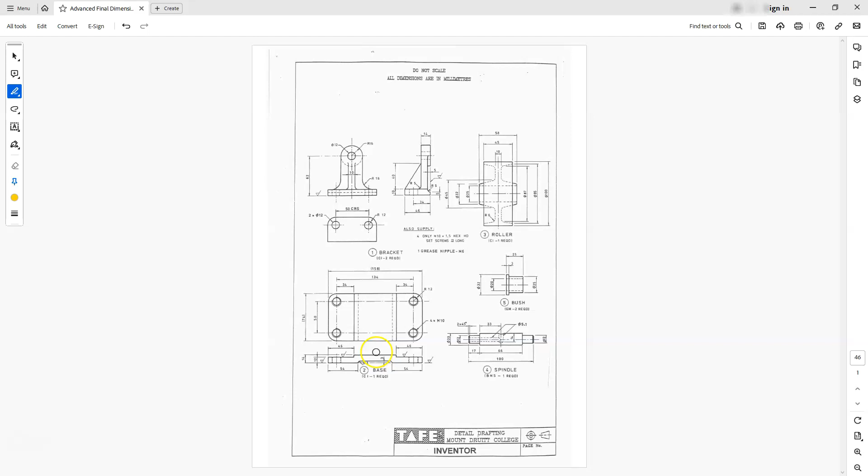Alright, so in this video we're going to be looking at the base. Once again, make sure that we're going to set up Inventor to do it in millimeters. And let's go ahead and get started on it.

Okay, so whether your screen looks exactly like mine or not, or you may have some other stuff going on here, the simplest thing I'm going to do is go ahead and click on the new icon here. So click on the actual piece of paper, and mine should jump automatically to the metric one because that's the one that we used last.

So remember that if yours is looking like the English US, you just hit the drop down and then click on metric, and then here are your options. So I'll choose the standard millimeter and then hit create.

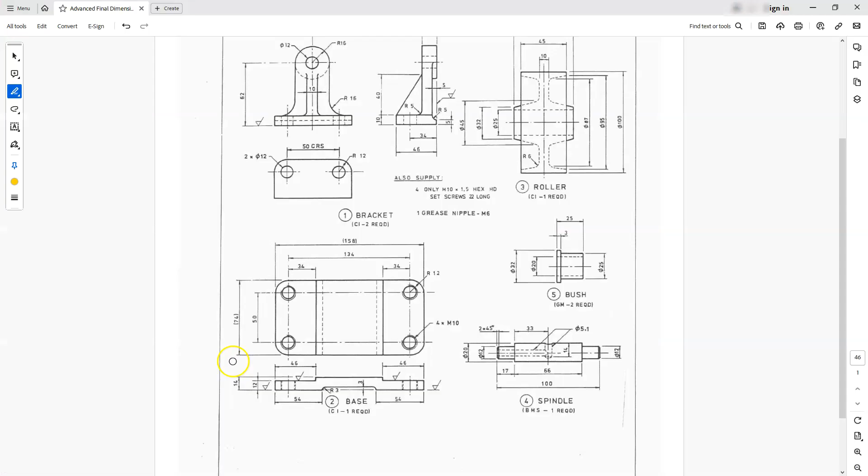Alright, so looking at this, I always try to visualize and see which would be the quickest way possible. And you can see that if I go ahead and create this shape here along the bottom and extrude it, most of the work will be done for me. So the only things I'll have left to do, you can see I'll have holes and fillets to do. But from that point, I think I'll be done. So I'm just going to create this bottom shape that looks like this.

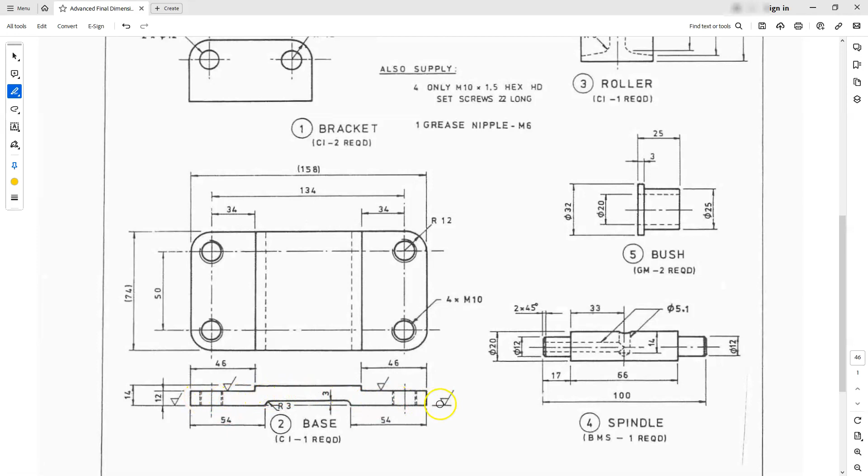Okay, so remember that you can hit the S button on your keyboard or select this icon. And then I have to tell it where I want to start this at. So I'm just going to start it again on the XY plane. And what I like to do is just kind of freehand and draw that shape a little bit. So I'm going to go starting from here.

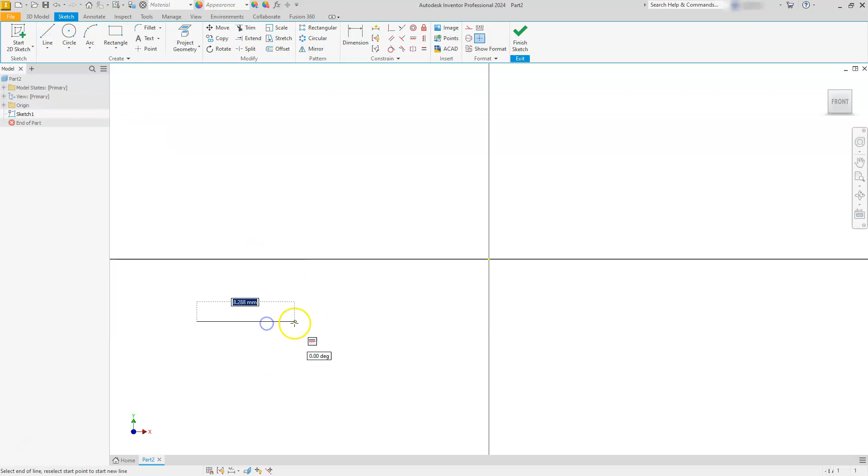I'll click here. And I can already type in a certain number since I know that that first length going this way is 54. I can go ahead and take care of that dimension here. And that's going to actually save me some work. And we can continue to do this around here if you like. So I can go up this direction, 3. Make sure that you're getting those little icons to appear.

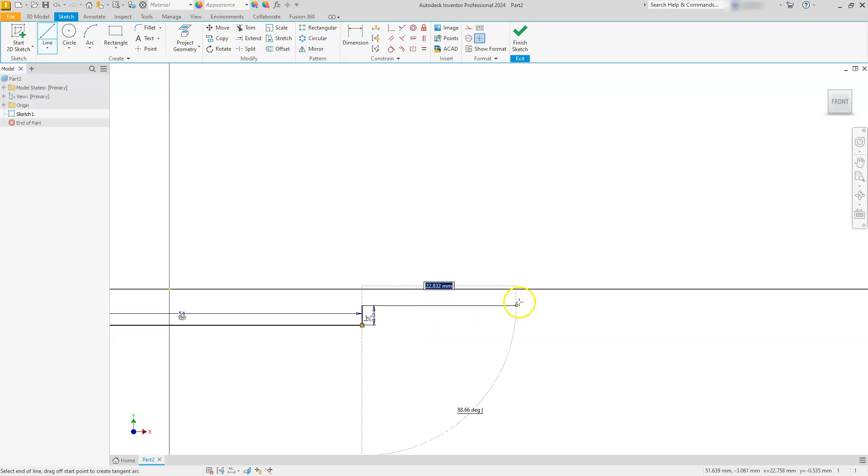I don't quite know how far this is, so I'm just going to click at a certain distance, come down, and now I'll get the tracking off of that point, and in this case, that's what we want. Do a left click, go this direction, 54 again. I'll zoom out a little bit, and I'm just going to go upward. And then I do have the height of this, and it's sitting at 12. And all of these numbers I will show you on the PDF. So I'll go 12 this way.

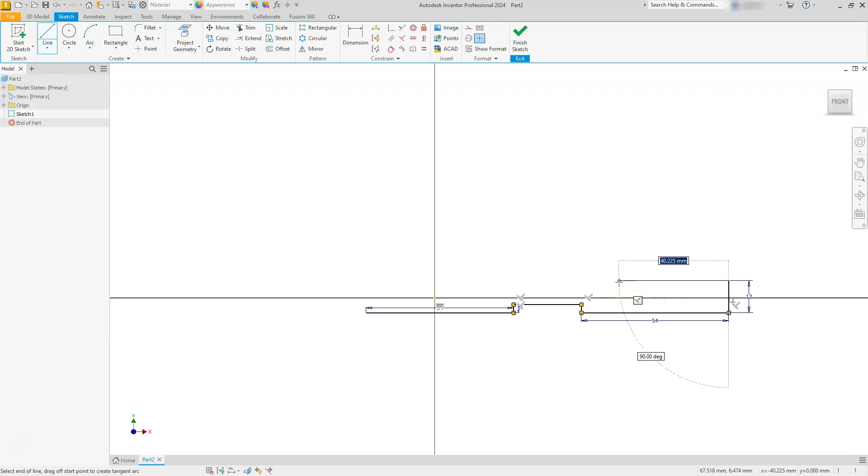This is at 46. Go up a number, doesn't matter. I'll go this direction, and I'm just going to kind of freehand the rest of this in. Try not to lock in on any of these other points here at the bottom. So I'll just come here, go down to where it meets here, come over to here, and then close it at this endpoint.

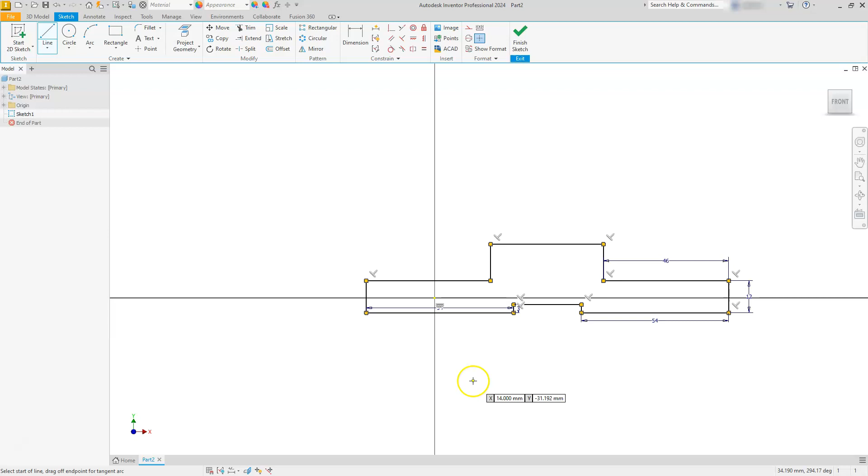Alright, so the reason I didn't put the other dimensions in is because I don't know the distance of this yet, so I'm just going to let Inventor solve that for me. Alright, so the next thing I'm going to do is go ahead and put the overall dimension on here, so I'll select this line, and then this line, come up, click, and that number is going to be 158.

So a lot of those numbers that you saw me create were both of the 54s. I created the 46. I also created the 3 here. And then I did a 12 on one side. Oh, I also did the 158 as well. Alright. So the next thing you're going to see me do is go ahead and lock in this number here.

And if I do that correctly, it should lock in these two numbers. Alright. So I have to put in one more 46, and then I can choose whether to put the fillet on this view or on the one that extrudes through. My advice to you is that most of the fillets I try to keep in one command, so therefore I will omit putting the fillet on my sketch.

And I'm doing that here in Inventor. If you want to see me do this one in AutoCAD, I will link that card up here next as well, so you can see there's kind of a difference. In AutoCAD, I will put all of these in, just to be on the safe side.

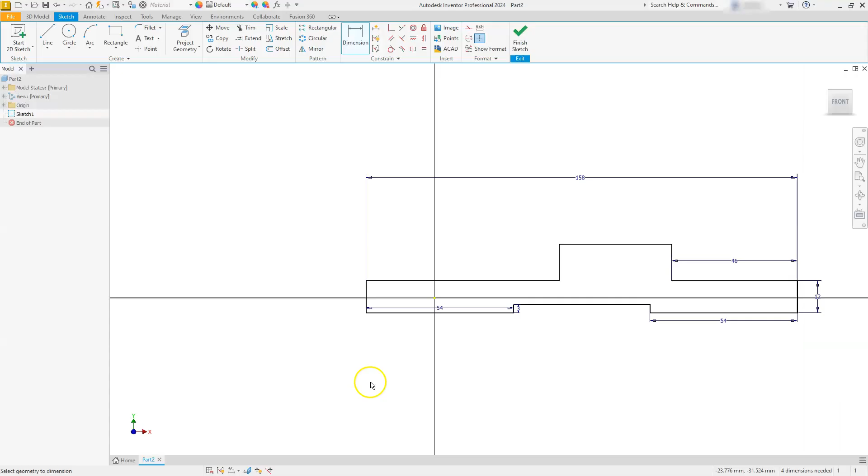Alright, so looking back at this, I'll go ahead and put my dimension of 46. Now there's another option here. If I don't want to actually physically put this dimension here, and I know it's going to be exactly the same as this, and keep in mind that I'll only do this if I know that something is going to exactly and always be the exact same thing, and in this case, yeah, we're not going to edit this.

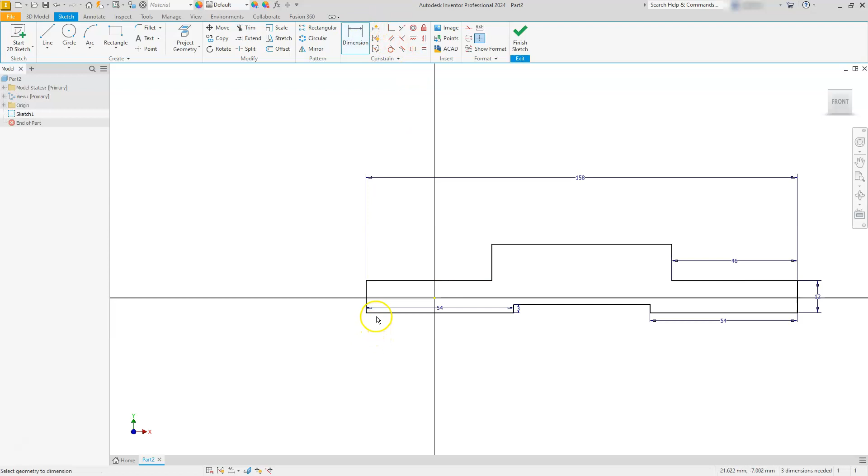I can use the equal constraint, which is here, and then I can just select this line and this line. So that's going to go ahead and create that at that 46 for me without physically putting a dimension there. Then I'll go back to the dimension. I'll go from here to there, and then I'll go ahead and place that at 14. And now we're at that point to where I need 2 dimensions, right?

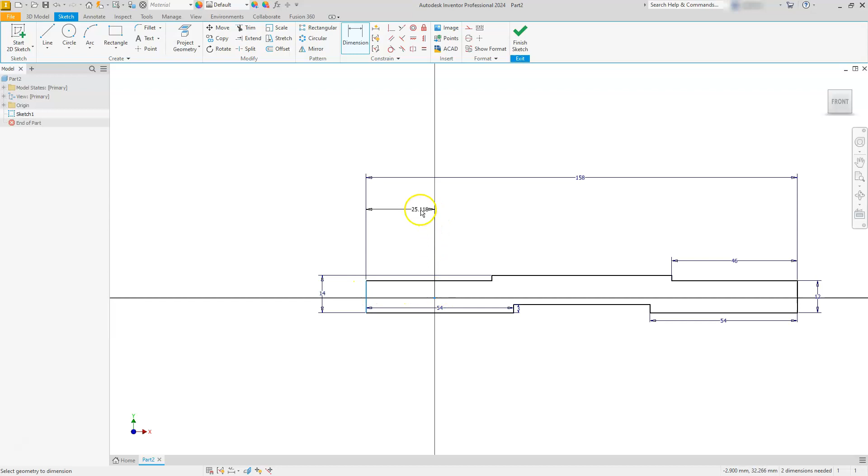One thing I like to do is always center my part on this dot. So I'm going to go to dimension, select my dimension, then select the yellow dot. So I selected that line, and then that yellow dot or the center point, click here, and then I'm going to type in a number. In this case, I want it to change as a function, so every time the length of this thing changes, I want it to always be in the center.

So while this is highlighted blue, I'm going to select my 158 dimension and divide it by 2. And you're going to see that your whole entire part moves over. I can do the exact same thing. So if I want to center this thing, the overall shape on this dot, I can select the dimension from this bottom line to the yellow dot. I'm going to drag to the left, and then I'm going to left click. So once I left click and place my dimension, I'll select the 14, and then I'll divide it by 2.

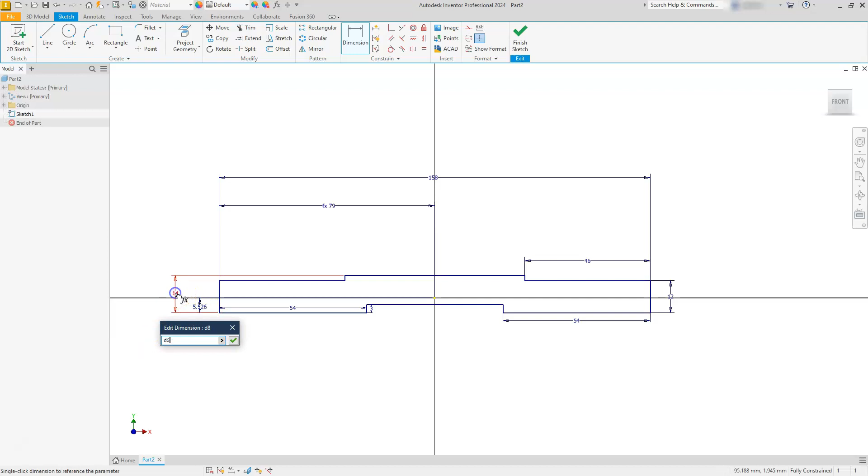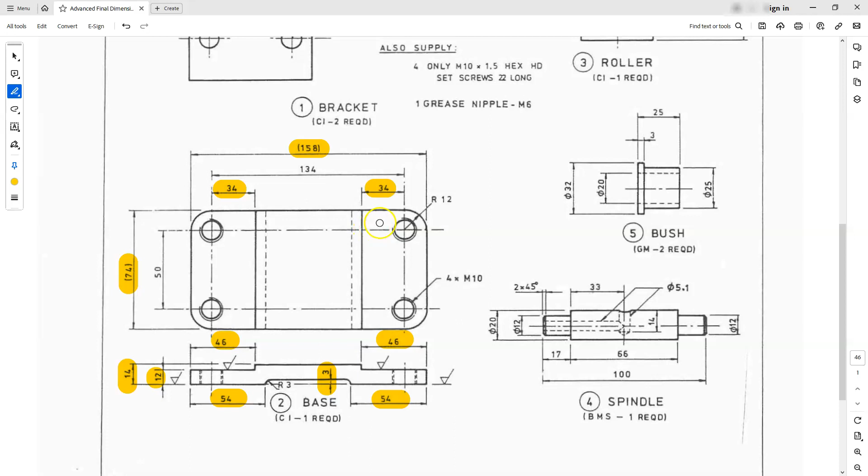You've seen on the other video when I created the bracket for this, that this 34 I actually didn't use. Really, it's because if you do the math on that, you will see that the center of your circle is always at 30, or at 34 from this one, just based off of the arc. So if you want to do the simple math of that, you can.

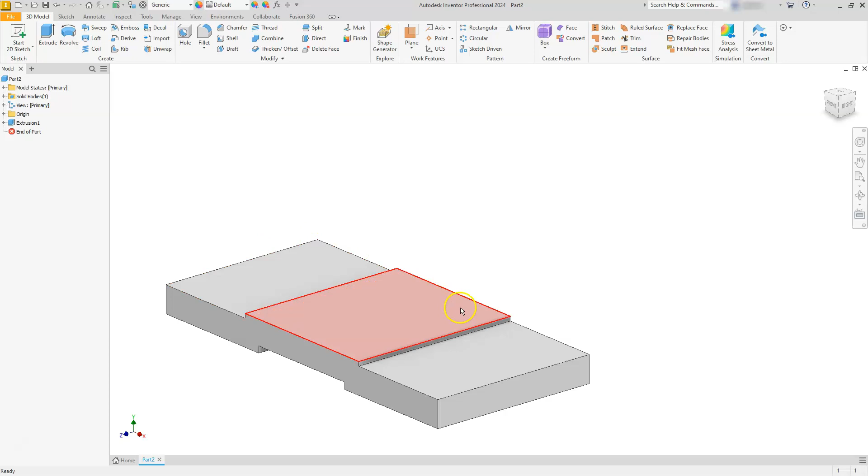Alright, so that length that I need here is going to be 74. I do tend to keep everything symmetric, and that way I can keep all of my planes in one location. Go ahead and hit OK. Next, I'll go ahead and take care of all of my fillets. So remember that we have a fillet going here and all around these corners at a radius of 12. And we also have underneath here, we have 2 fillets that are sitting at 3. So let's go to Fillet.

I'm going to start off with my big ones first. I'm going to tell it 12, then I'm going to select these corners. Just going to spin it around to the other side here.

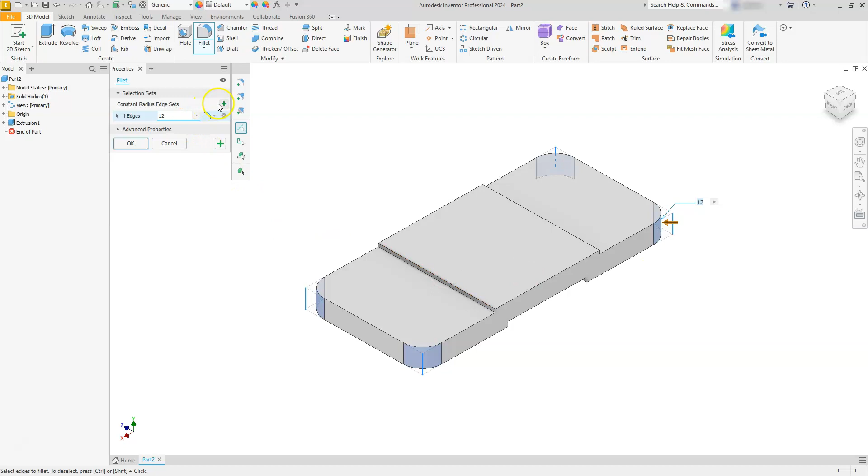Next, I'm going to put in my 3 ones. So I'm going to hit the plus sign that is located here. I'm going to change that number to 3. Then I need to look underneath here, so I'm going to select this bottom cube here. You're going to see it rotate up.

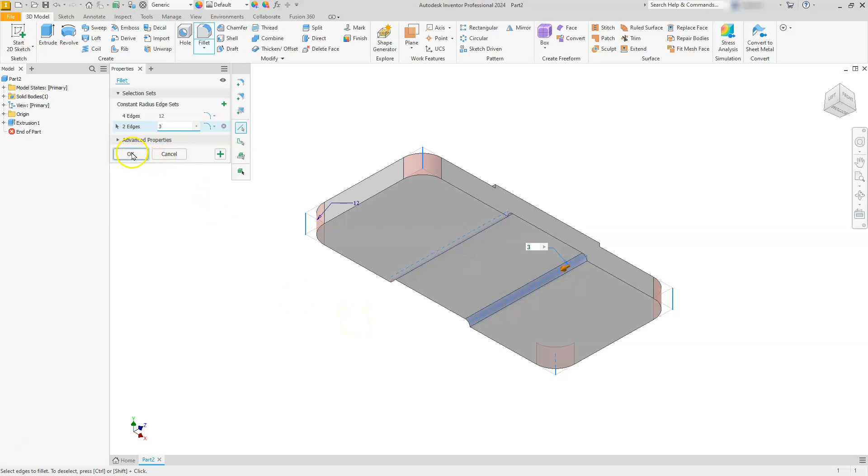I'm going to select this line here, then I'm going to rotate it one more time here. So I clicked on that twice, and then I'll do that one. Go ahead and hit OK. And all of my fillets are done now.

Alright, lastly the thing I need to do is go ahead and tap these holes. So I need to put holes in here that have a thread profile.

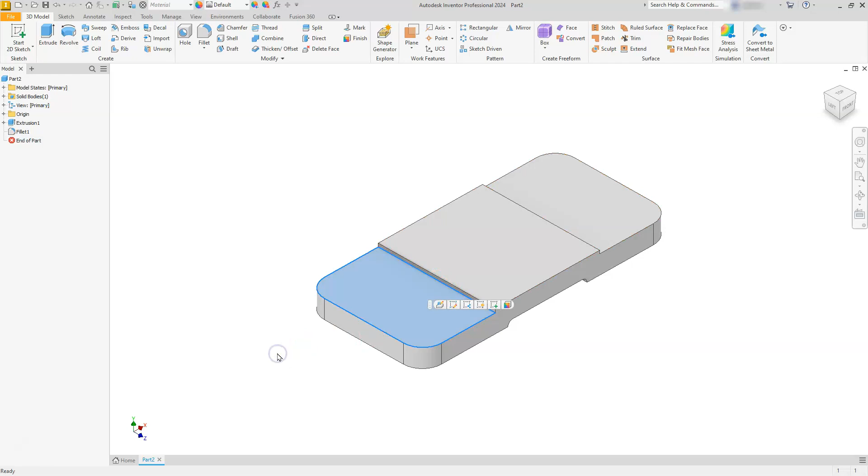Alright, so all of these holes are going to be the exact same size, so I'm just going to create a sketch so I can capture them all at once.

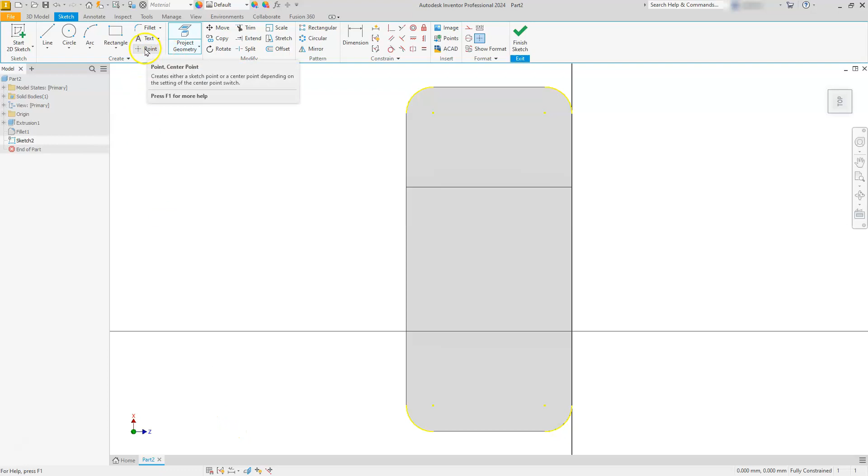So I'm selecting this face. I'll select this icon. I'll choose Project Geometry, and I'm going to select these 4 arcs on the outside. Then I'll go to the Point command, and I'll click at each of the centers of my arcs.

Once you're done with that, go ahead and finish sketch. Go to the Hole command, and you're going to see that it automatically does those holes and it has them at a size of 12.

Well, that'll be okay, but in this case, we do have threads in these holes, so I'm going to choose the tapped option, which is here.

And next, it's going to ask me to give it a type of tapped hole. In this case, it's going to be a metric profile, so I'm going to choose an ANSI metric M profile. Next thing I need to do is select the size of it. In this case, it's going to be a 10.

Now you need to tell it how or what to do or how far you want these threads to go. I'm just telling it right here to go through all. Go ahead and hit OK.

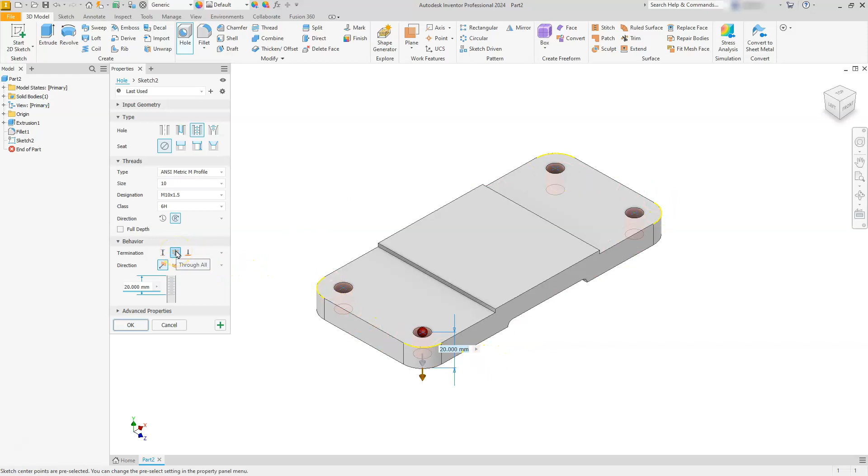And let's go ahead and check the PDF and make sure that there's nothing that we forgot. Alright, so I did make sure that I used these 4 M10 holes. I took care of my radius here, and I also took care of my radius here.

If I want to, just to verify, I'll show you how to go and measure both of these, just so you can be on the safe side.

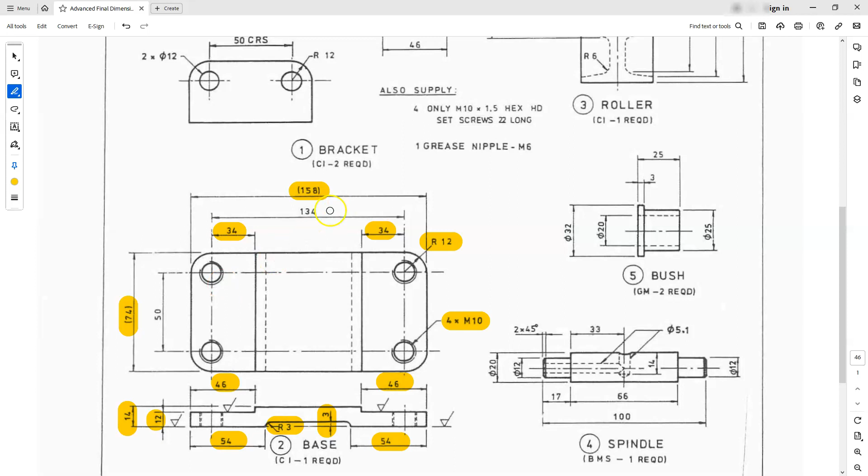Okay, so one of the things I need to do if I want to inspect the distance between each of these holes is that I'm going to go to the Inspect tab, and then I'm going to choose Measure. Keep in mind that if you don't want to go through all of these other steps, just hit M on your keyboard, and that's what the little M is for. So I'll go to Measure.

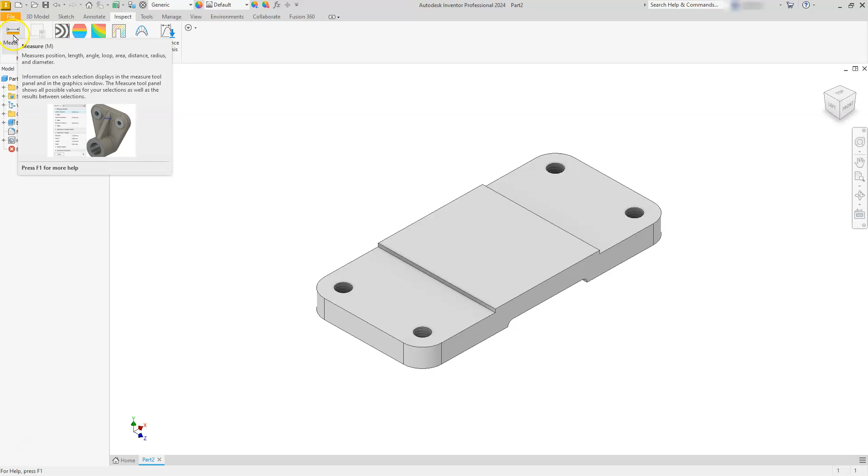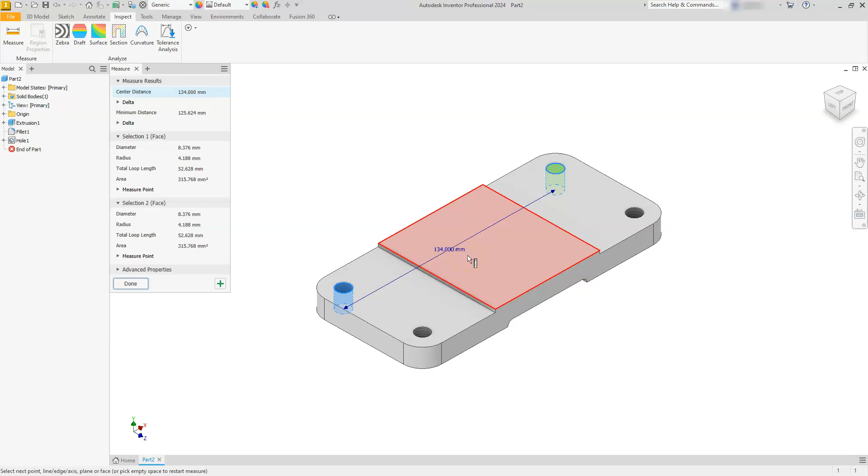I'm going to go to this hole, and then I'm going to select this hole. And it's going to tell me that it is 50 millimeters in front of it. I'm going to do a right click out here in the white area. Then I'm going to choose Restart, and I'm going to select this hole, and I'm going to select that hole. And you can see that that does tell me that it's 134 between each one.

Okay, go ahead and hit done. So I verified that all of my dimensions are correct, and I think this part is totally complete.

Make sure that you save this one as your base. Alright, and once you save it, I think we are totally complete with this one.